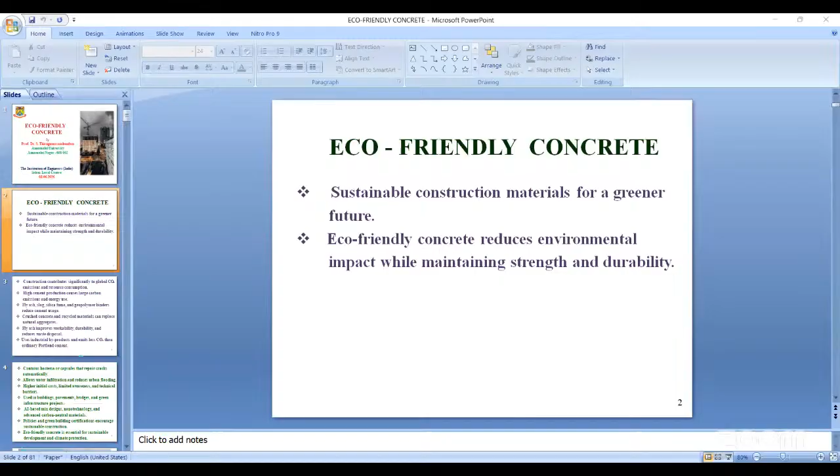The slide show is not coming. Sir, slides are also sharing, it's visible, and you are also audible. The slide is here on your screen - eco-friendly concrete, sustainable construction materials - these are all visible on the screen. So you can go on, but the slideshow is not automatic. Do you want to make it automatic? Okay sir, yes sir. Now it is okay, sir. Fine, sir.

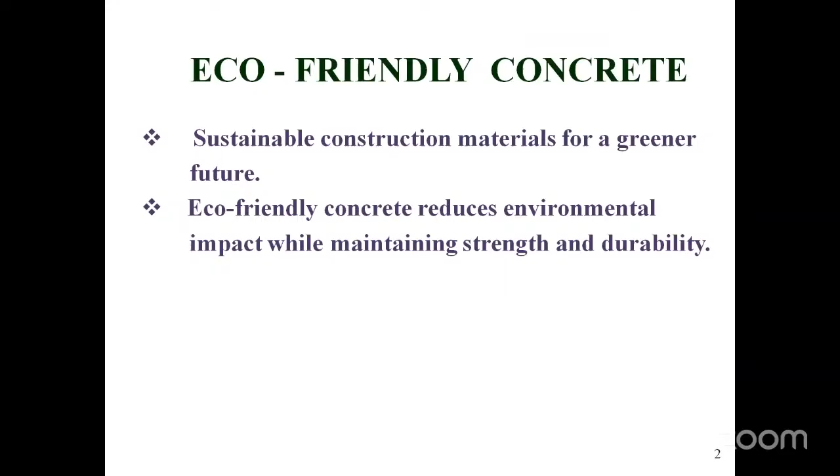In general, construction contributes significantly to global CO2 emissions and resource consumption. Let me take the first raw material used in concrete, that is cement. When you produce cement, an equivalent amount of carbon dioxide is emitted from the cement factories. So that is one of the major points we have to see. As far as possible, we have to minimize the emission of CO2 from the cement factories, or we have to eliminate cement from the concrete. So those things we are going to see in this seminar.

Second point: high cement production causes large carbon emissions and energy use. So this is a point we have to make very clear. As far as possible, we have to reduce the usage of cement by means of using supplementary cementitious material such as fly ash, slag, silica fume, and geopolymer binders.

What are these ingredients? Fly ash, slag, silica fume, and geopolymer binders - one by one we are going to see. Fly ash is the byproduct obtained from thermal power stations. Slag is obtained from the steel industries. Silica fume is also obtained from the steel industries. Geopolymer binder is one of the new materials people are now using to create binding properties in constituents of concrete without cement. We will see it in brief.

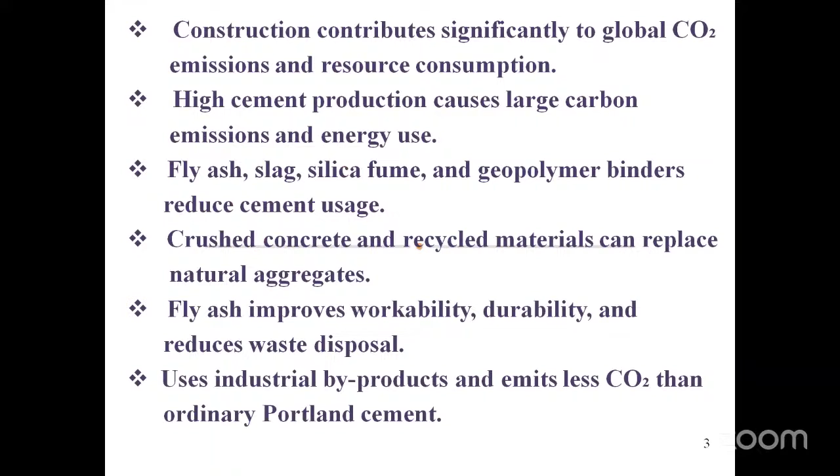When we use fly ash in concrete, it improves workability, durability, and reduces waste disposal. Nowadays, people are using fly ash as a partial replacement in cement. In cement production itself, people are using this fly ash, producing PPC from OPC. When you use these kinds of industrial byproducts, it emits less carbon dioxide than ordinary Portland cement.

Next, how to make greener concrete. Nowadays people are using bacteria in concrete in capsule form. If you use this bacteria in concrete at the time of production, it will repair cracks automatically in due course. That is one of the reasons people are making bacterial concrete nowadays.

Then another type is pervious concrete. In urban areas, especially in road construction, this concrete allows water infiltration, thereby reducing urban flooding. That is pervious concrete.

When we use these kinds of greener concretes, what will happen? What are the advantages and what are the limitations? We have to see in brief. Initially, if you introduce these kinds of greener concepts in concrete, it will increase the initial cost, and there is limited awareness. So we have to create awareness among educationalists as well as industrialists to put it into practice. And sometimes there are technical barriers too, which we have to eliminate or reduce.

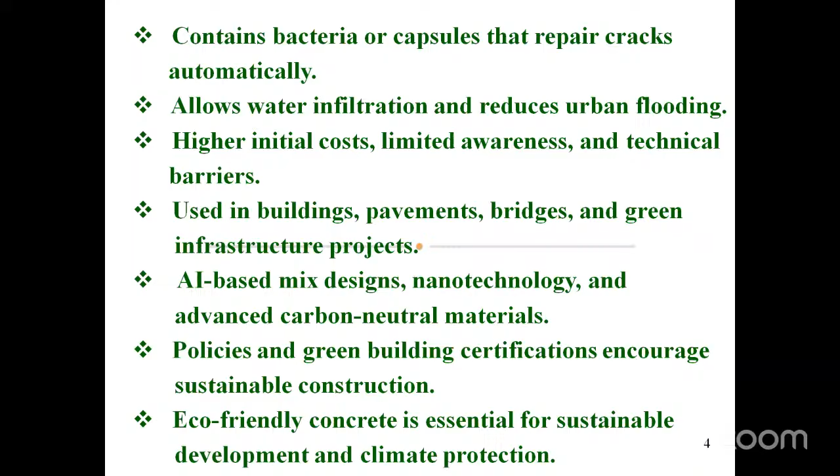Next, as far as government policies are concerned, some legal forces are required to bring green concepts into buildings, and certification is also required for sustainable construction. This is the government side; we need not worry about that. When you use this kind of eco-friendly concrete, we have to make sustainable development and climate protection possible. So this is the introduction about eco-friendly concrete.

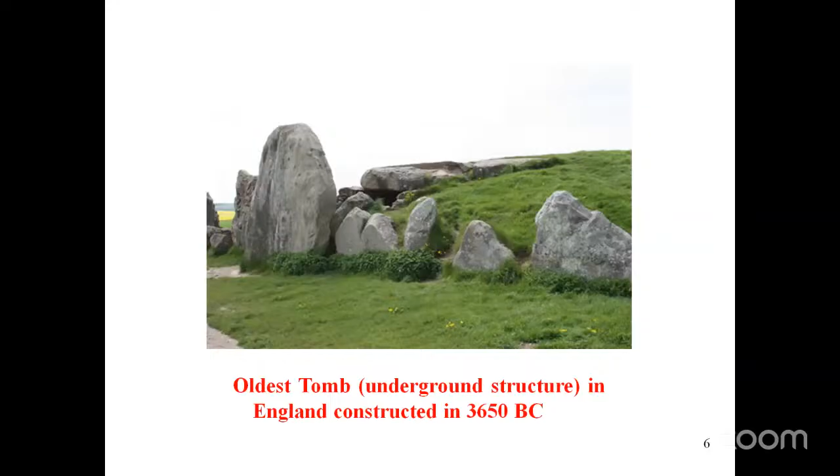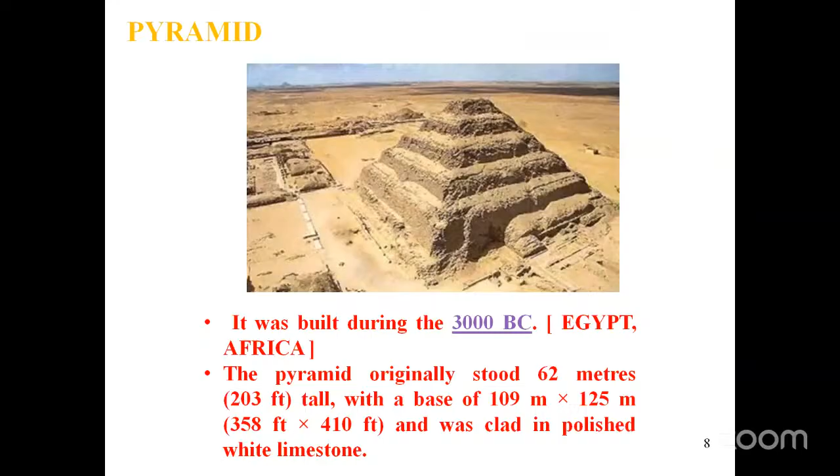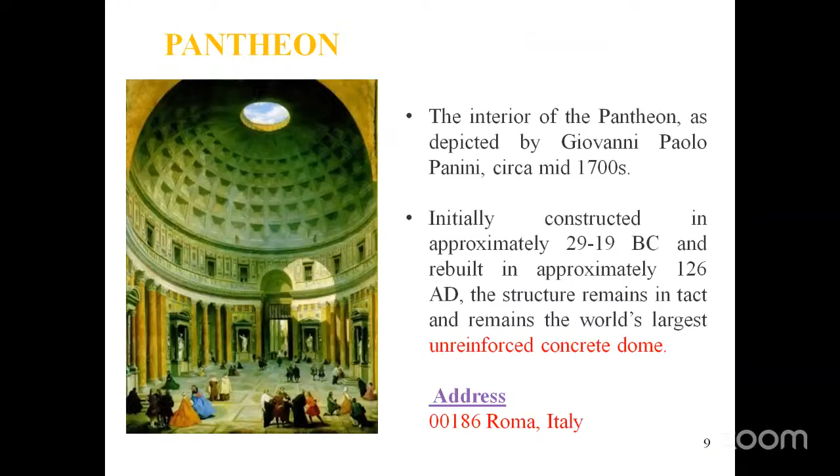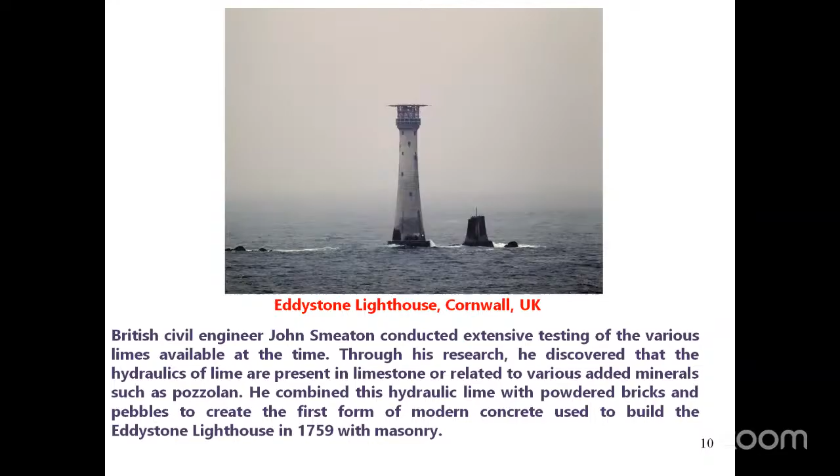Now we can see the historical evolution of concrete. In 1824, cement was actually invented by Joseph Aspdin and patented in England. Before that, before the Christian era around 500, you can see the Rome civilization and initial ancient pyramids. So we need not worry about these old structures.

Coming to the invention of cement era in 1824, and the introduction of steel in concrete in the year 1903, slowly development happened in the form of precast construction in the year 1950.

In this 21st century, people are now focusing on producing eco-friendly concrete because, as I said earlier, the ingredients in concrete - cement, fine aggregate sand, coarse aggregate jelly, and water - these four components are creating problems in terms of procuring and securing these materials safely and cost-effectively. So these are all the things in the historical evolution of concrete.

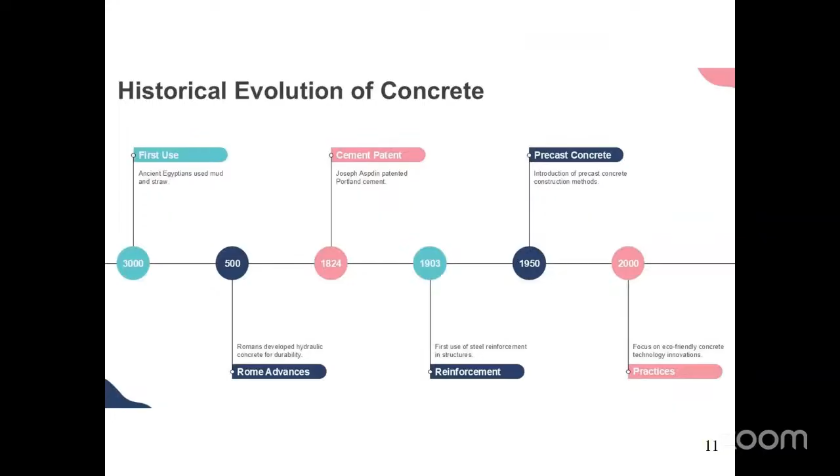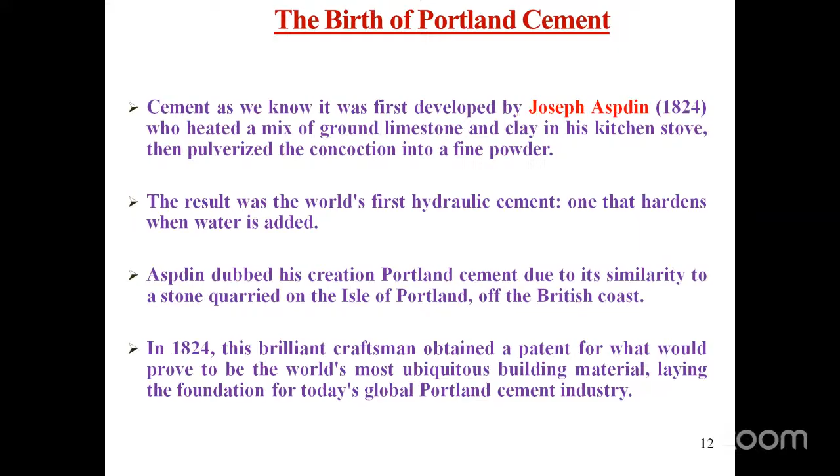Now we can see the development of concrete right from the birth of cement. Actually, this cement was developed by Joseph Aspdin, a mason's son, in the year 1824 in UK. Almost 200 years have been completed.

The cement usage in this construction industry. We know very well in the initial stage we produced only ordinary Portland cement OPC, and nowadays with the introduction of mineral admixtures like fly ash, we are producing Portland Pozzolana cement PPC. In the case of OPC, we have different grades: 33, 43, 53. But in case of PPC, no grade was awarded in India.

With respect to weight of concrete, we can have four categories: ultra lightweight concrete less than 1200 kg per m cube, light weight concrete less than 1800 kg per m cube, normal weight concrete, that is our conventional cement concrete weighing 2400 kg per m cube, and heavy weight concrete more than 3200 kg per m cube. So this is based on weight: ultra light, light, normal weight, heavy weight.

Based on the strength, we can classify concrete as low strength, less than 20 megapascal compressive strength, moderate strength concrete 20 to 50, high strength 50 to 200, and ultra high strength more than 200 megapascal.

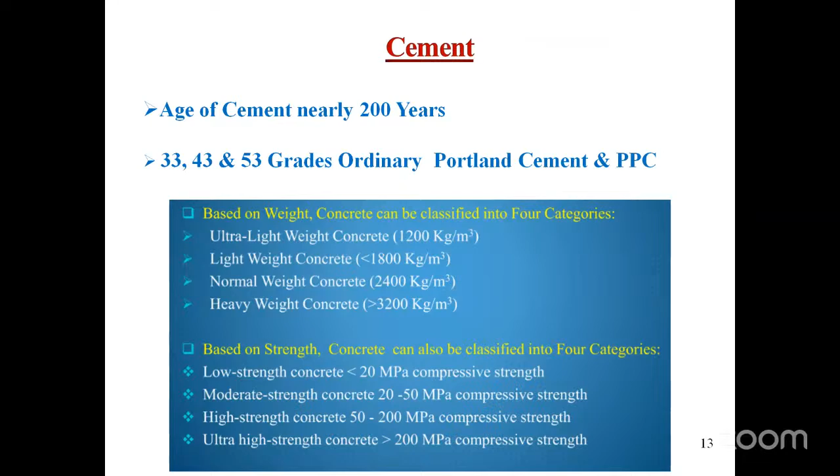Now we can see the current scenario in production of concrete. Nowadays everywhere demand increases vastly for raw materials. As we discussed earlier, procurement of cement, fine aggregate sand, and coarse aggregate is difficult due to continuous fluctuations in availability of raw materials. There are frequent hikes in cost prices of raw materials due to inconsistent availability. These raw materials are contributing to global warming by using cement. So now we are in need of finding alternate raw materials for making concrete eco-friendly.

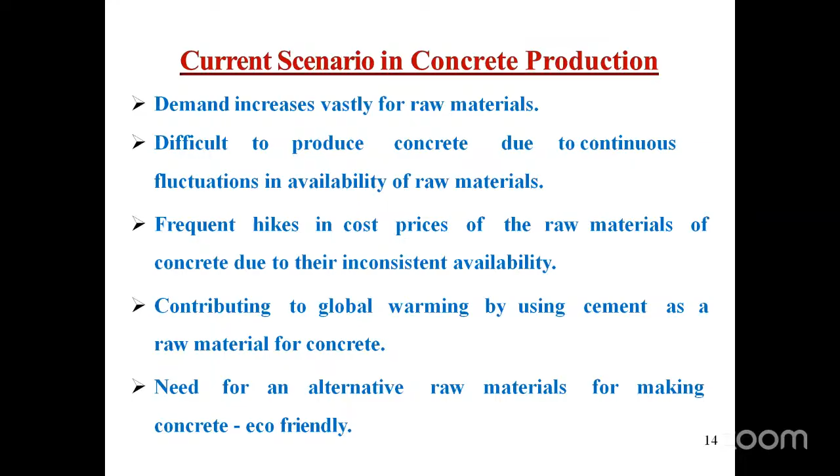Coming to concrete in general, why is concrete so popular? Concrete can be fabricated practically anywhere. It can be molded and cast into a wide range of shapes and geometry. It is relatively cheap, stronger, and more durable. It is a versatile material. What do you mean by versatile material?

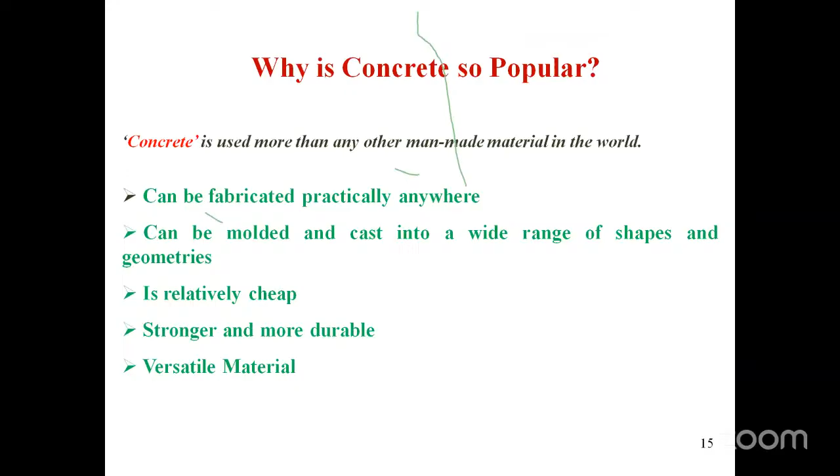We never worry about mix design, but for M15 and M20 we manage to get by. If you go for a higher grade, more than M25, it is very difficult to get the nominal mix proportions. At that time we need IS 10262 to support. Now coming to admixtures in concrete.

Chemical admixture, mineral admixture - we do not worry about mineral admixture. Nowadays we are getting PPC cement, which includes supplementary cementitious material. So automatically we are getting PPC in addition with the mineral admixtures.

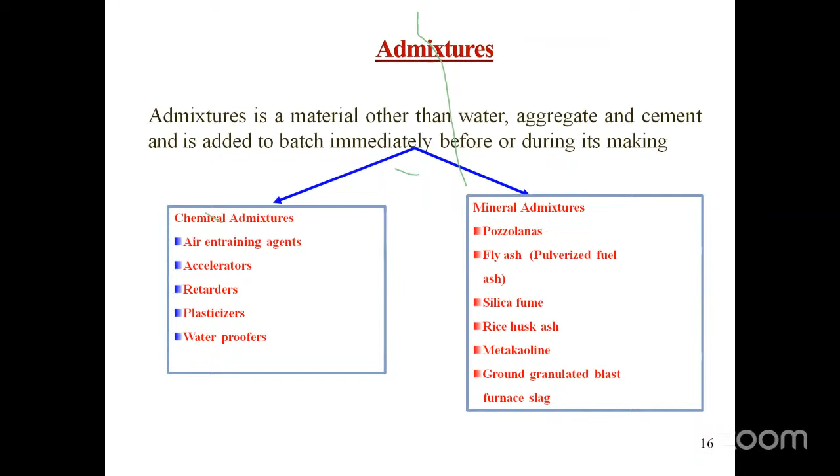Coming to chemical admixtures, with respect to special concrete we need some special chemical admixtures. In general we are using SP superplasticizer, that is the general chemical admixture normally people are using. We need not worry about other chemical admixtures used for special applications.

Coming to quality of concrete - it is very important with respect to durability of concrete. So several points we have to see, right from water cement ratio. As I said earlier, concrete is the most democratic material in the world, so nobody is worrying about water cement ratio. When you increase water cement ratio, what will happen?

Normal water cement ratio we are obtaining from the mix design as per IS 10262. If you add more water, what will happen? Strength decreases. If you reduce water, what will happen? Shrinkage - slump will be affected, workability will be affected. So with respect to IS 10262 mix proportions and water cement ratio, we have to be doubly careful in selecting the water cement ratio.

We will see some slides on the technical aspect with respect to water cement ratio, then sand stone ratio - that is the ratio between fine aggregate and coarse aggregate - and cover depth. In general people are using cover blocks in slab as well as beams, but with respect to exposure conditions, the thickness of cover varies, so we have to be doubly careful in getting the cover.

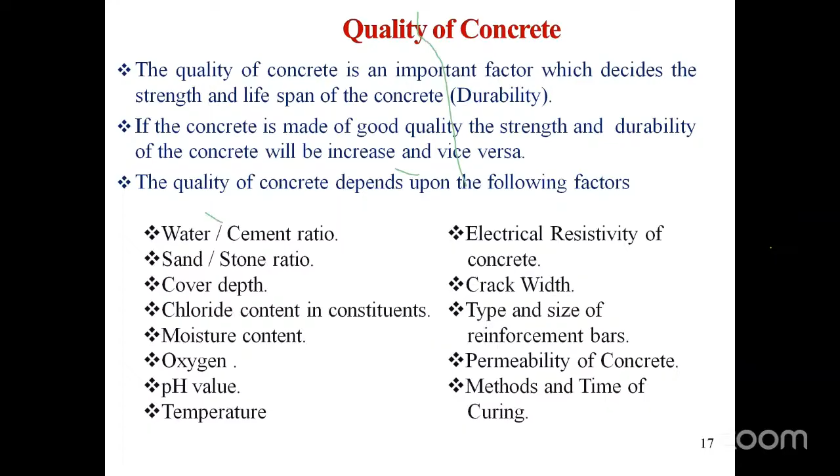Okay, then electrical resistivity, crack width, type and size of reinforcement bar, permeability of concrete, method and time of curing - one by one we have to see it elaborately. Due to running short of time, I am just passing these slides.

Now we can see the basic material properties. Normally people are concentrating on density of concrete. Suppose if there is 5% voids in concrete, what will happen to strength?

You see the note given below this graph - 5% voids can lower the strength by as much as 32%.

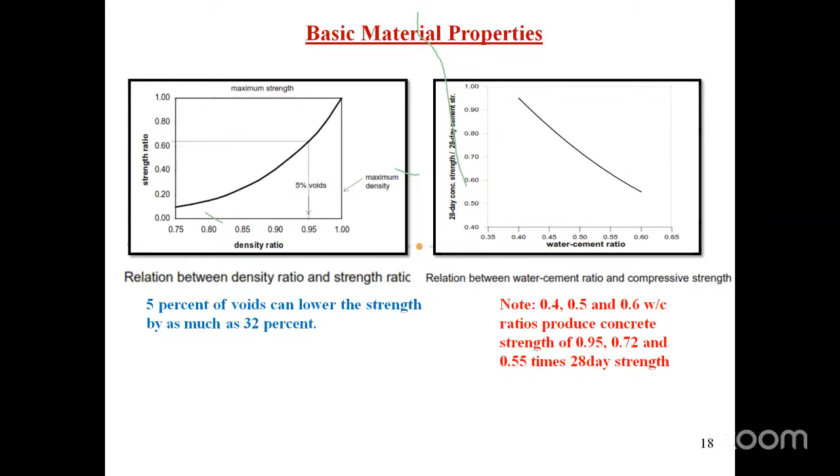Another important technical point - if you see the stress strain curve of concrete with different grades, which test is required to get this stress strain curve of concrete?

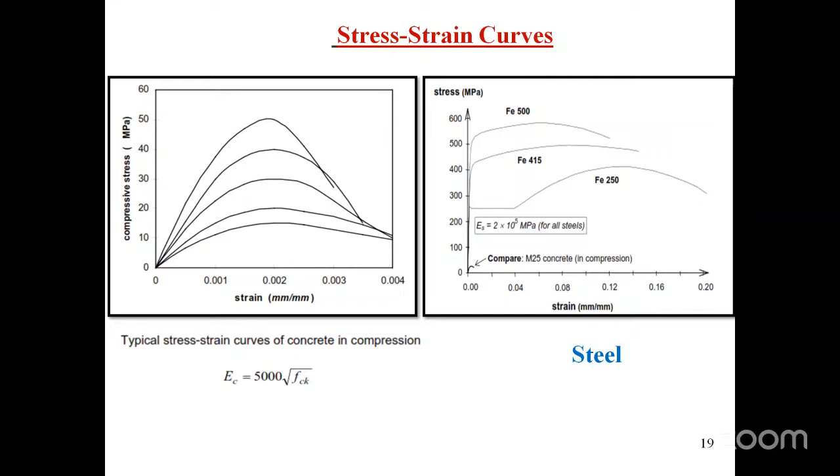But at the same time, what is the modulus of elasticity of concrete in different grades of concrete? Is it constant? No, it is varying with respect to compressive strength FCK. We can get the modulus of elasticity of concrete, that is 5000 into root of FCK approximately. EC is varying, but ES is constant for all grades of steel.

Next, coming to the design strength of concrete, the value of concrete compressive strength obtained from a concrete specimen in the Indian scenario, British standard, is a cubical specimen of 150 mm. From that we are getting the FCK value, and 0.67 FCK - that is a reduction of strength of 33%. Again, to get the design value of concrete, we are applying a partial safety factor of concrete, that is gamma m.

What is gamma m for concrete? What is gamma m? Concrete's partial safety factor - how much? Sir, 1.5. 1.5, sir. Very good, right.

What is the step down from FCK to 0.67 FCK? 33% reduction is given initially. What is the reason behind it? Sir, if it is for safety factor, sir.

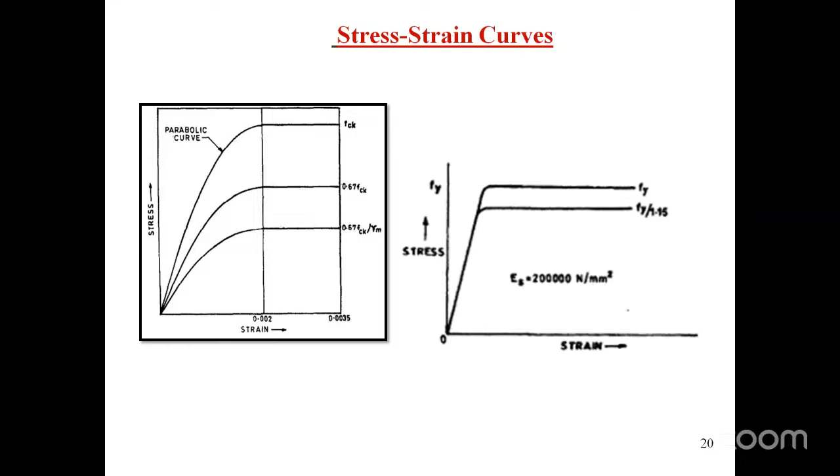Coming to the steel side. Steel is a factory made product. If steel is 10 mm, you will use 10 mm only; if 12 mm, 12 mm only, in the factory it's 12 mm and on site also 12 mm. So there is no reduction to take care of size of the specimen. Are you able to understand this point?

Clear? Yes sir, right. So coming to different types of concrete, quickly I want to wind up this session. We'll just see pictures. There are n number of types available in concrete.

Normal strength, that is M20 grade concrete, general. Then plain or ordinary concrete - plain concrete from M5, M10, people are using for getting platforms and all. Then RCC, pre-stressed concrete, precast concrete, lightweight concrete, high density concrete, air entrained concrete, ready mixed concrete, polymer concrete. N number of concretes available.

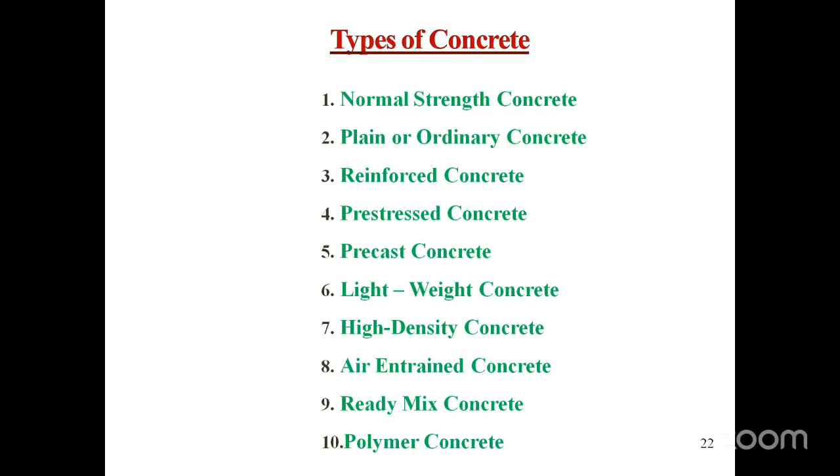Just a simple list is shown here, let us see one by one. Just pictures only I want to show you, there are no specific test results and all, right? This is fiber reinforced concrete.

We know different kinds of fibers, right? Glass fiber, carbon fiber, basalt fiber, then plastic polypropylene fibers. So what is the need of these fibers in concrete?

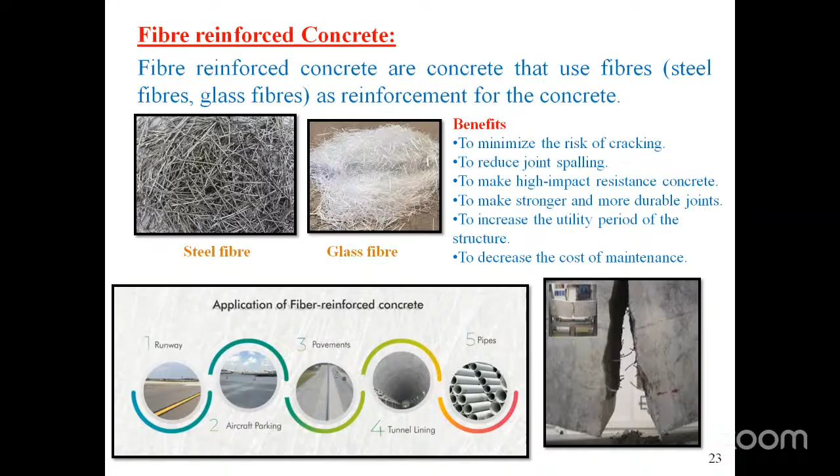Tensile strength. Very good, okay. Technically, flexural strength is getting increased when you introduce these kind of fibers in concrete. Steel fiber, glass fiber, there are several fibers available. We have to be careful in mixing and proportioning.

Right, this is textile reinforced concrete. Nowadays people are trying these kind of textile fabrics. I don't know the results, but people are working on it.

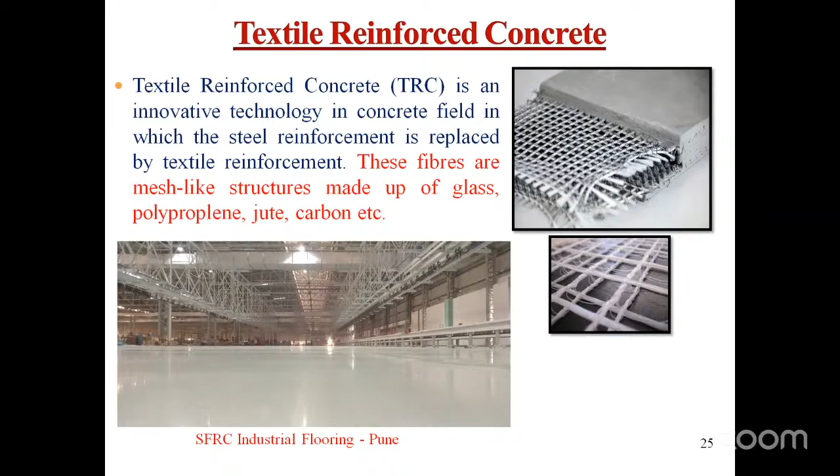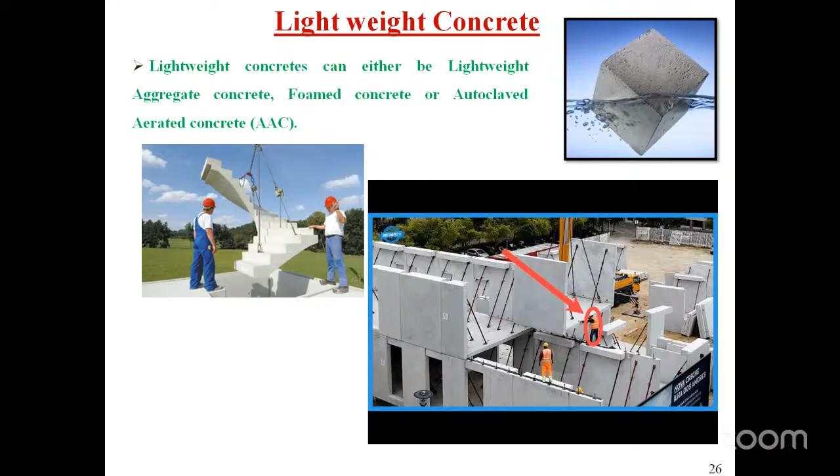Right, so this is lightweight concrete. Concrete is floating in water. The main drawback of concrete is self-weight of concrete. So now people are producing ultra light concrete by means of autoclaved aerated concrete, AAC. Ultra light concrete is being produced nowadays.

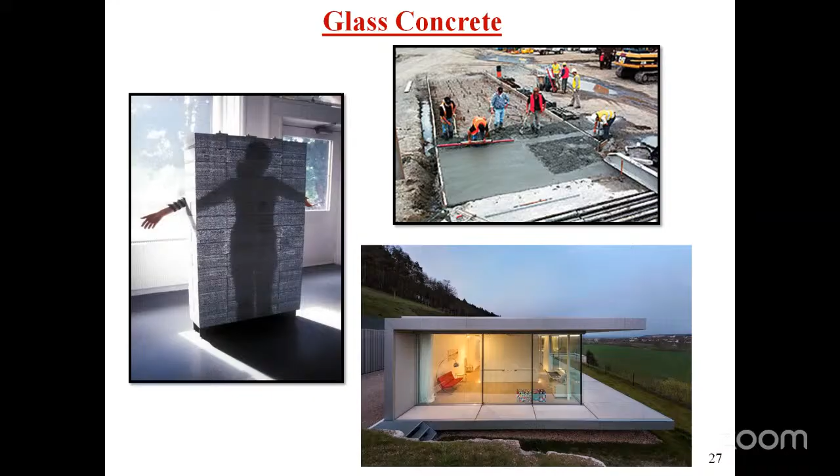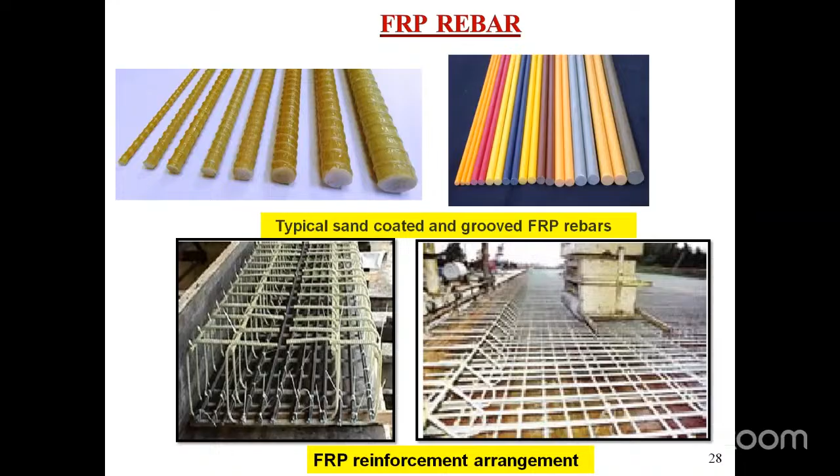Then this is glass concrete, right? For pavements and walls, people are producing this glass concrete, and the introduction of FRP rebars reduces or eliminates corrosion of reinforcement, right?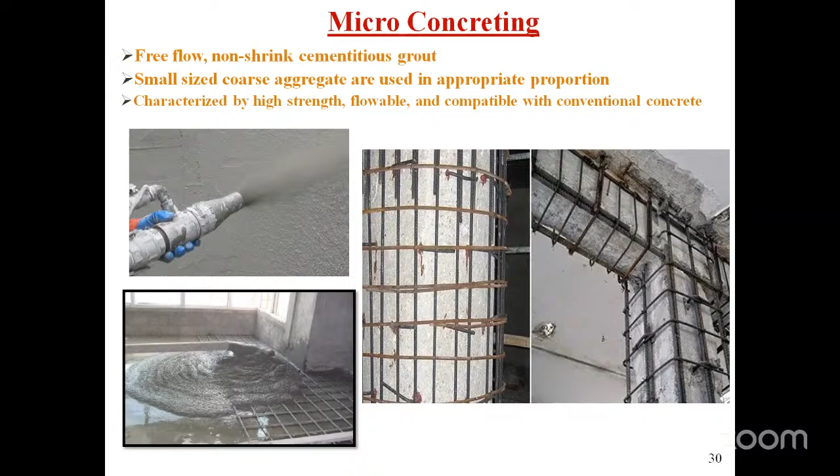Micro concreting is required for repair purposes. In these pictures, jacketing of newly introduced reinforcement is done with micro concreting.

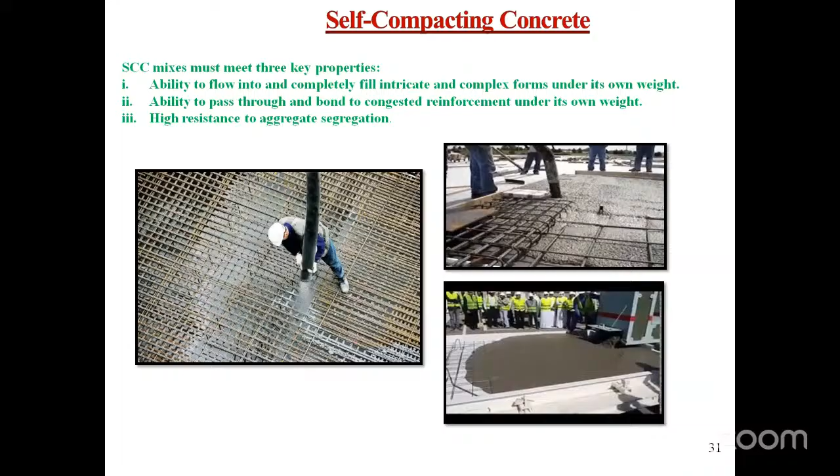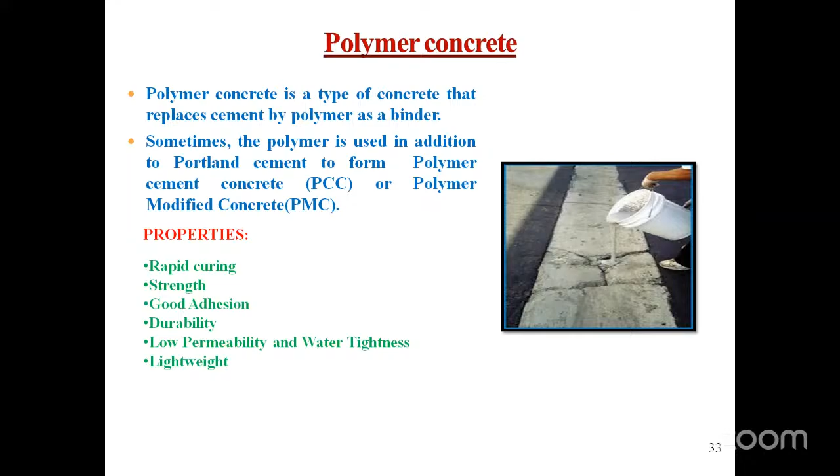Self-compacting concrete: the drawback of concrete is compaction, so to get self-compaction, people are introducing SCC nowadays. Then polymer concrete was introduced in the market. In general, PCC and PMC are used in case of repair works.

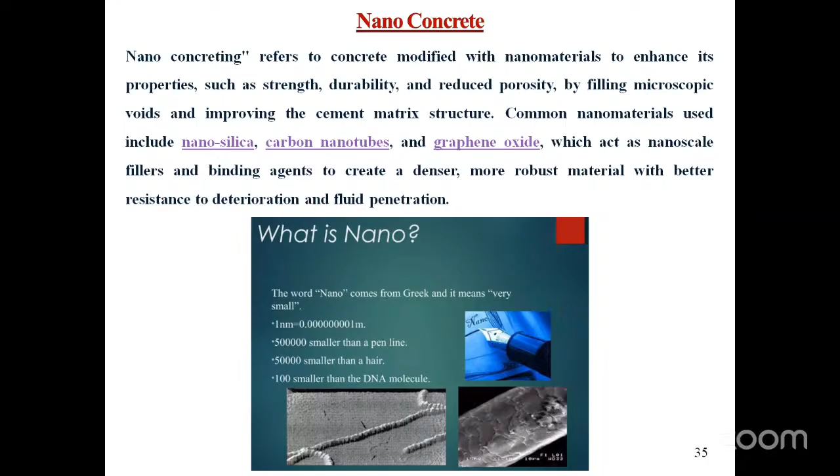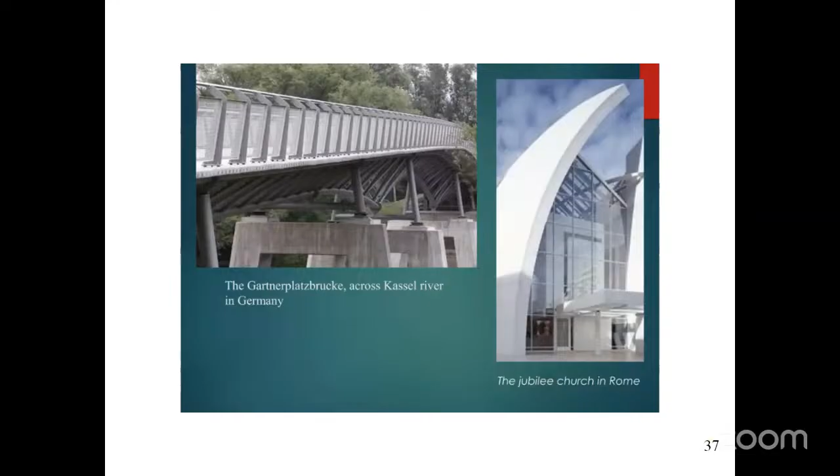Then nano concrete. Now people are producing nanoparticles, nanosilica, carbon nanotubes, and graphene oxides. These are all added to concrete to get nano concrete. The main purpose of introducing these nanoparticles is to get high strength.

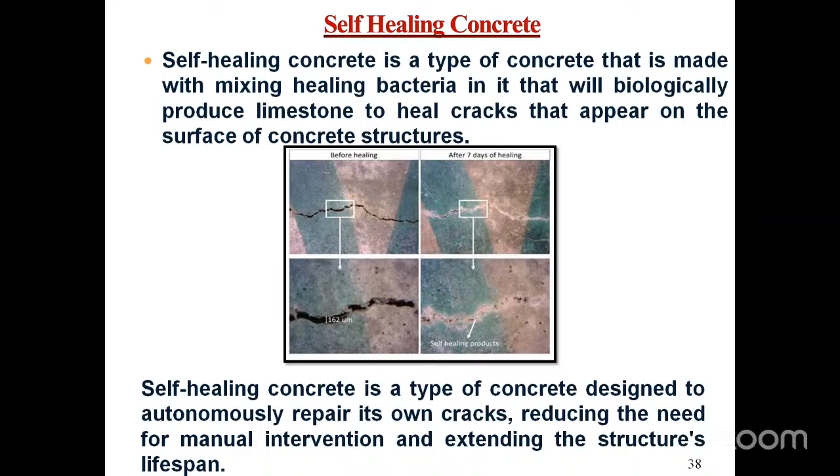Then self-healing concrete. When you use some healing bacteria at the time of mixing concrete, biologically it will produce limestone and heal the cracks when they initiate in concrete. So automatically the cracks get closed. That is called self-healing concrete.

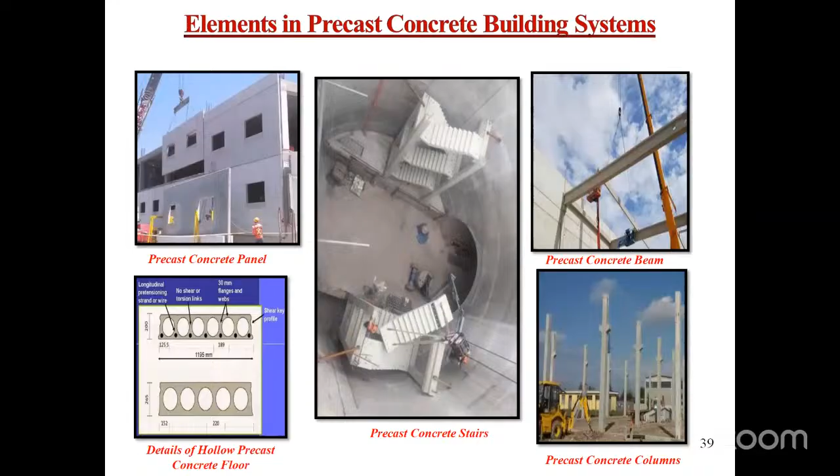Another revolution in the concrete industry is precast blocks, precast components. Still we are struggling in introducing these kinds of precast elements in normal constructions. For special constructions, Teamage and other leading group of companies are producing this kind of ready-made components, but it is not getting popularized. But in due course, we will see a lot of precast concrete building systems.

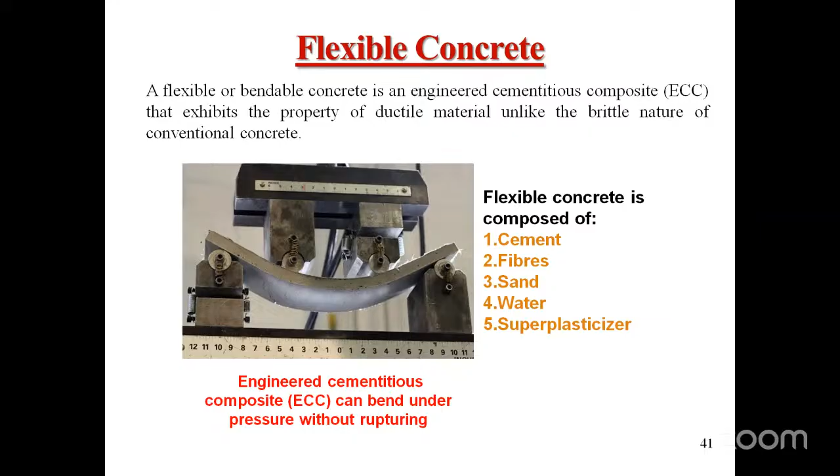Another new concrete is ECC, which is bendable concrete. Concrete can be bent like this.

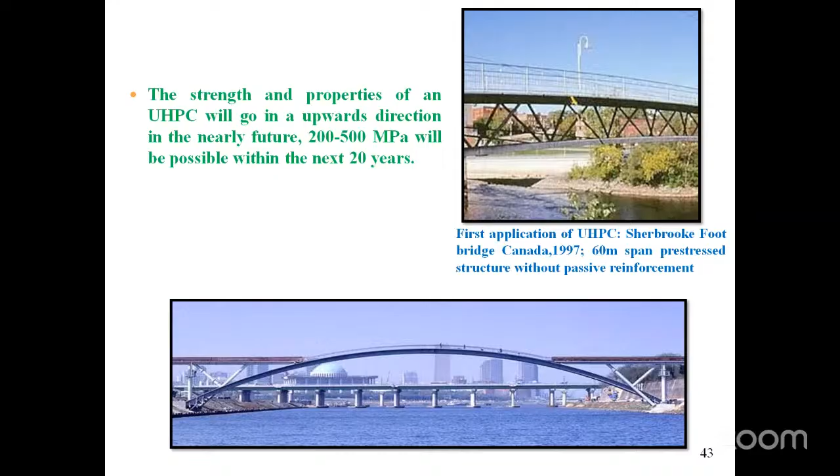Another one is reactive powder concrete. To get ultra high strength, people are producing this 500 megapascal concrete. In case of high strength bridges and other military operational works, people are introducing this.

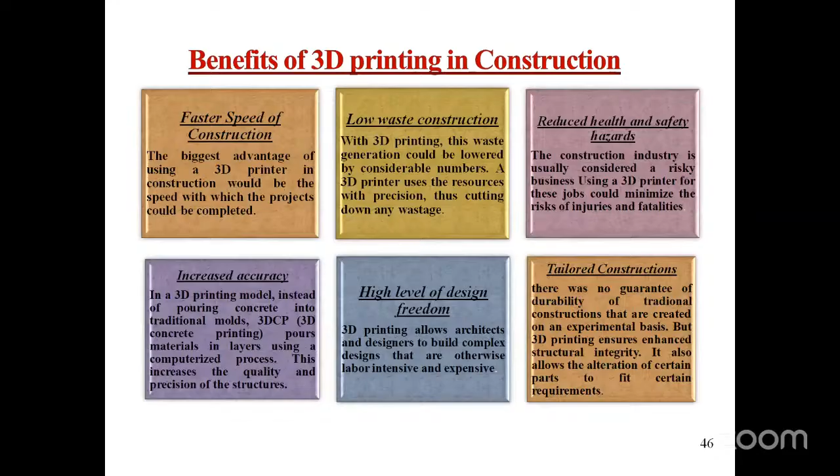Another revolution in the concrete industry is 3D printing. Only in some modules, people are trying to get this kind of 3D blocks and walls.

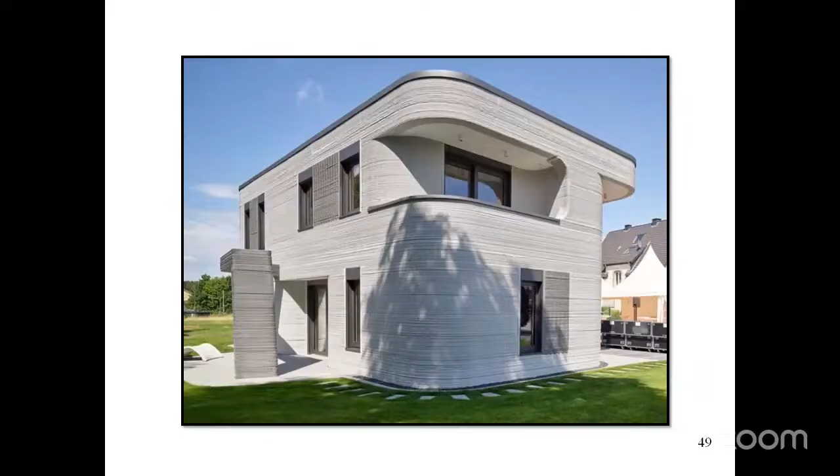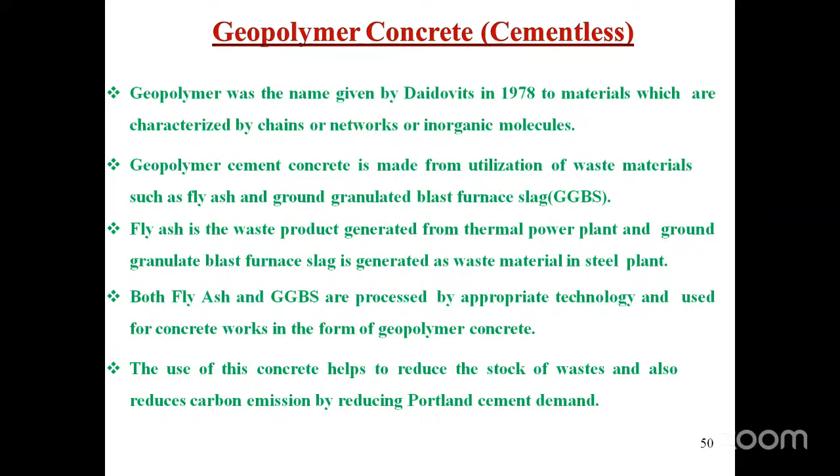Let us have a quick look at geopolymer concrete. Actually, I have been working in geopolymer concrete for the past 15 years. This geopolymer concrete is cementless concrete, introduced by Joseph Davidovits in the year 1978 in France. Here, cement is completely eliminated. Instead of cement, people are using fly ash, GGBS, and alkaline solution.

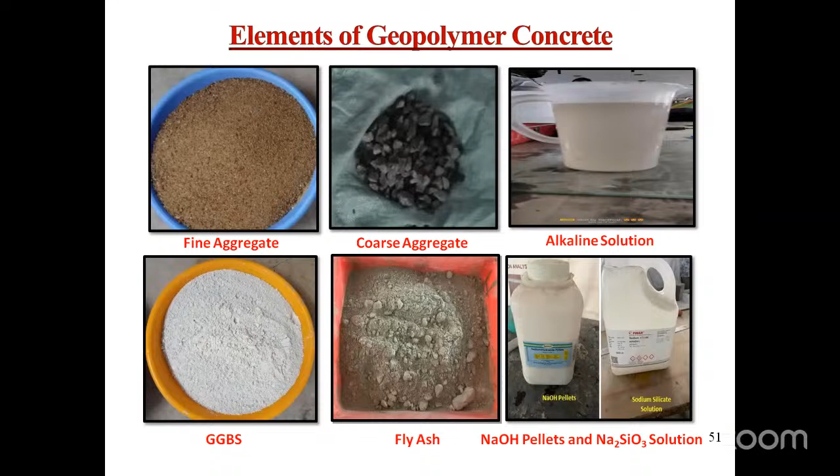That is the binding material. Apart from this, fine aggregate and coarse aggregate are same. Here, 0% cement is used. Instead of cement, people use fly ash, GGBS, and alkaline solution. What is alkaline solution? It is a mixture of sodium or potassium silicate and hydroxide. There is some ratio proportion; with respect to that, we mix this to get the alkaline solution. From this alkaline solution, you add fly ash, GGBS with the sand and coarse aggregate, and you get this geopolymer concrete.

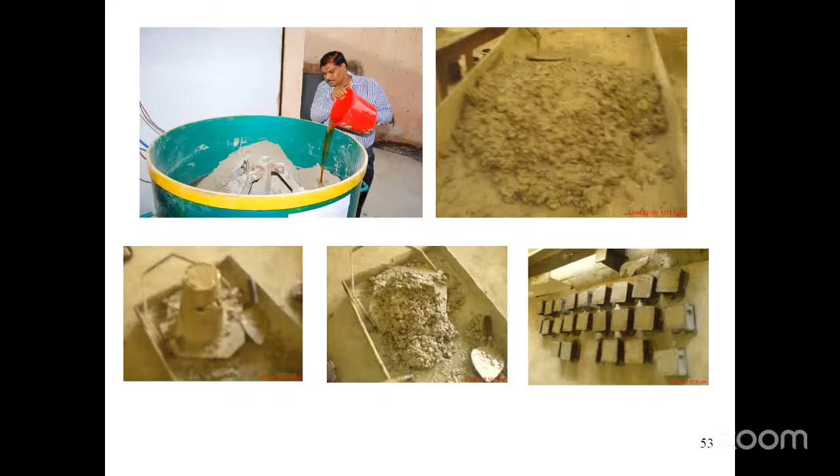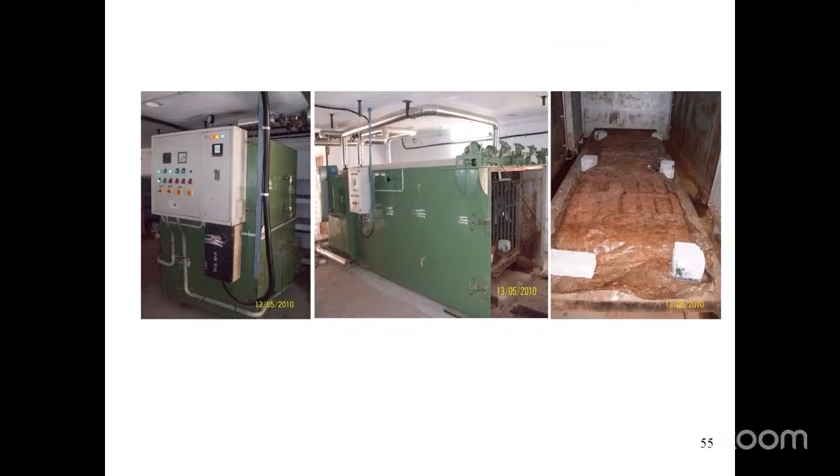The advantage of geopolymer concrete is curing. Initially, people tried this geopolymer concrete with hot curing. With 24 hours hot curing, we can get the 28 days compressive strength of concrete as obtained from conventional cement concrete. In that case, only people used fly ash. Nowadays, the scenario is changing. Introduction of GGBS in geopolymer concrete eliminates this hot curing or steam curing.

Very simple sunlight curing, that is called ambient curing, is enough to get the compressive strength of concrete. Even with 24 hours air curing, you can get the strength of concrete as obtained from conventional cement concrete. So this is the specialty of this concrete.

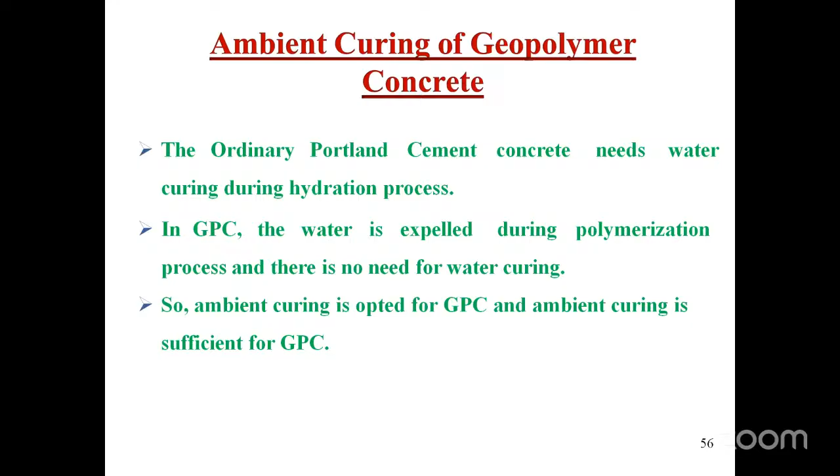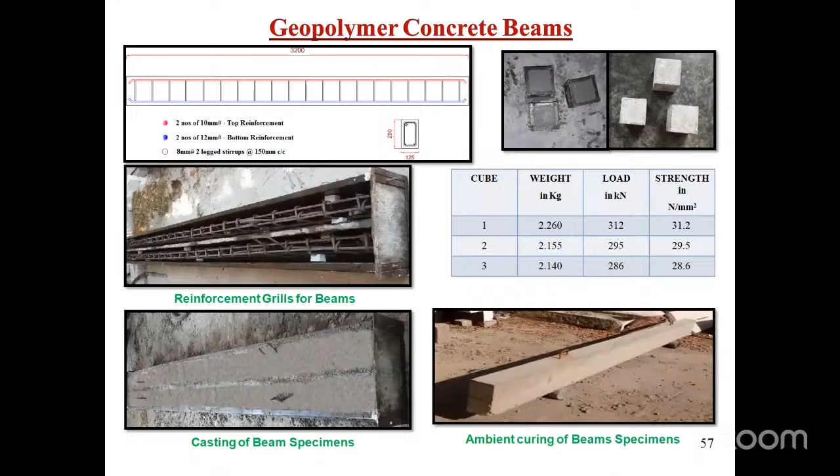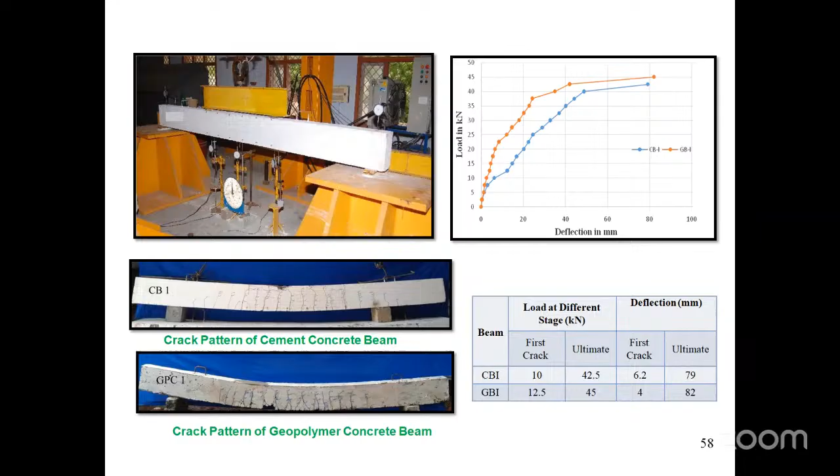In our Annamalai University, we have carried out a lot of experiments in our laboratory with respect to testing of RC beams, 3-meter beams. This is geopolymer beam and conventional cement concrete beam. We can see the comparison of load carrying capacity. I don't want to go into detail about the results and discussion, but you can see the comparison of how much load carrying capacity is in control concrete beam versus cement concrete beam and geopolymer concrete beam, and which is giving higher values.

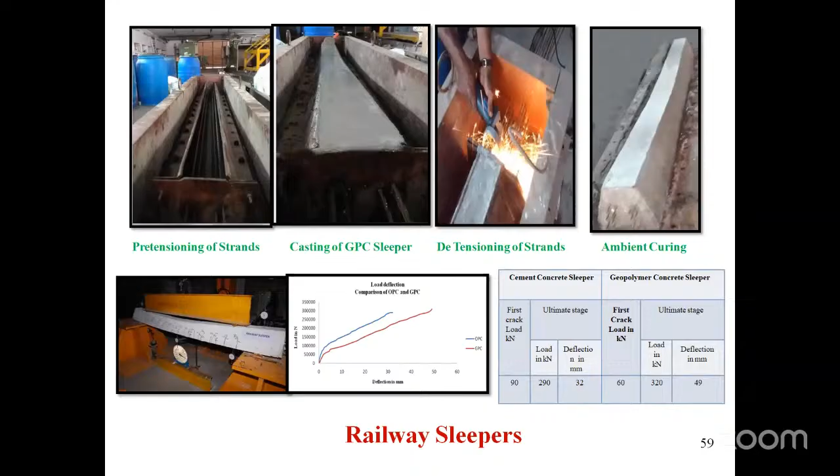Like that, this is railway sleepers. You know very well, these kinds of sleepers are made from PSC, pre-stressed concrete. Here, M60 grade concrete is used to get these railway sleepers. Comparison made between cement concrete sleeper and geopolymer concrete sleepers.

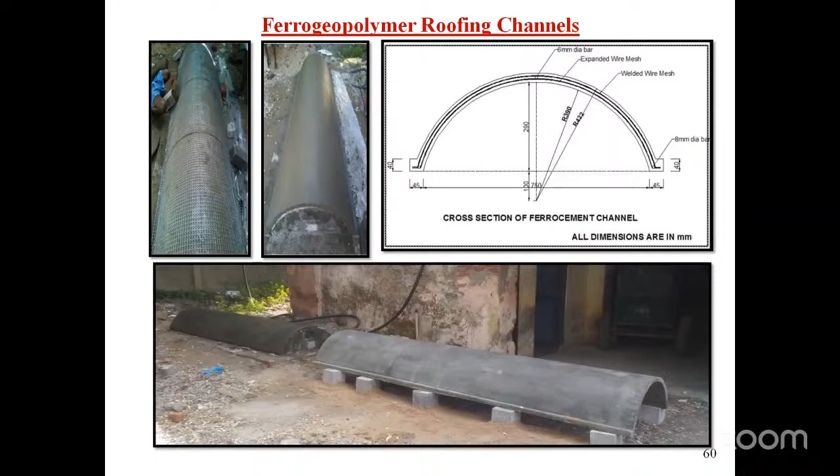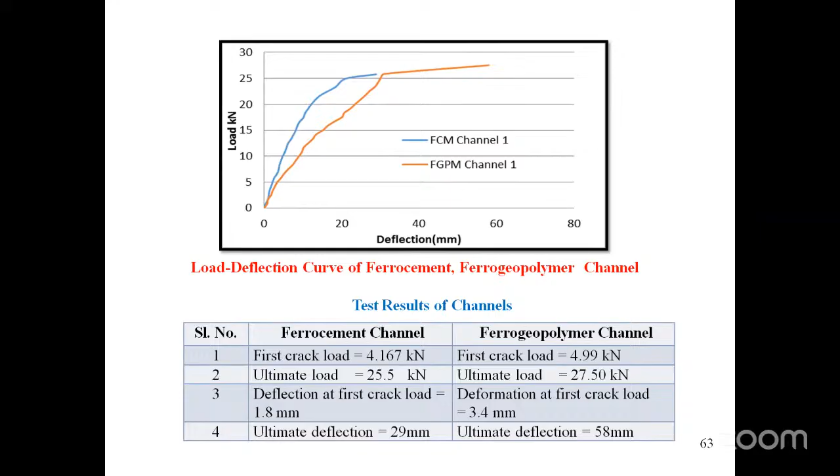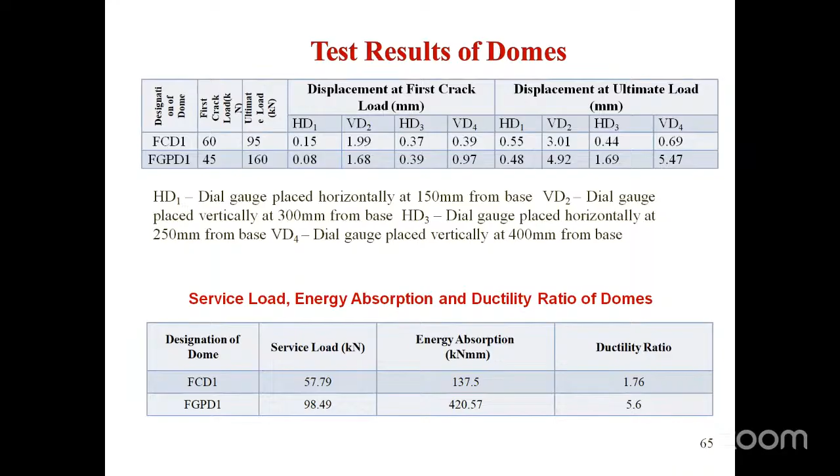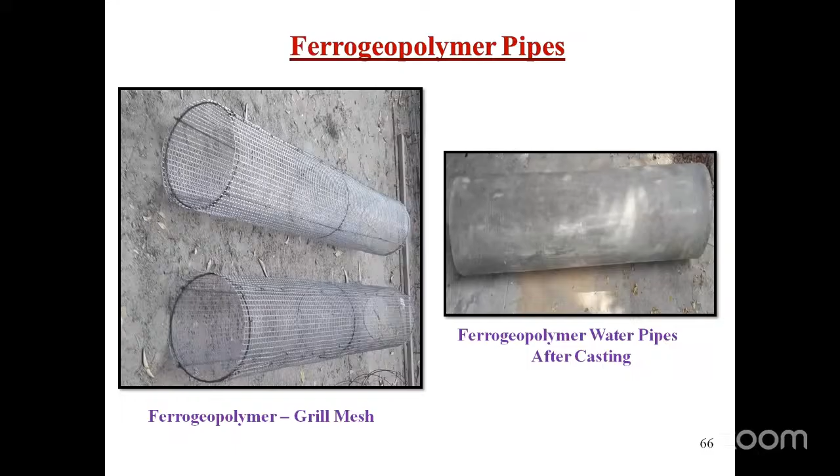Like that, several components of GPC elements were tested in our lab and compared with conventional ferrocement channel and geopolymer channels. This is domes. Here also we have a comparison between ferrocement domes and ferro-geopolymer domes. This is pipe - conventional ferrocement pipe and ferro-geopolymer pipes. The pipes were tested in our lab and the comparison is also given.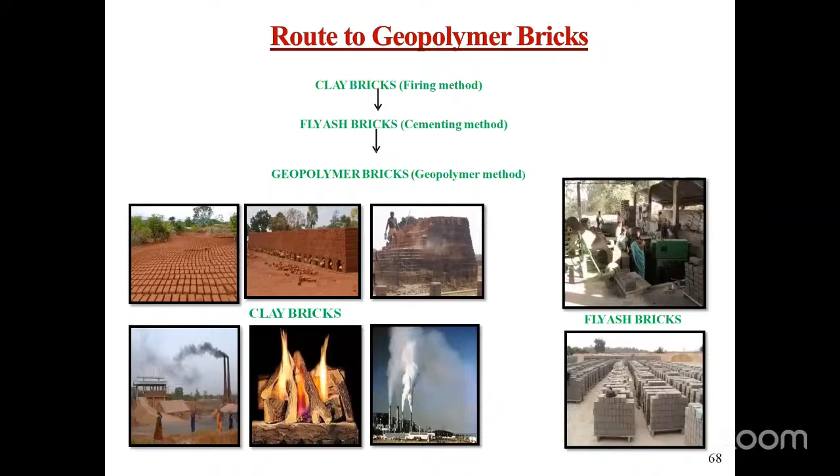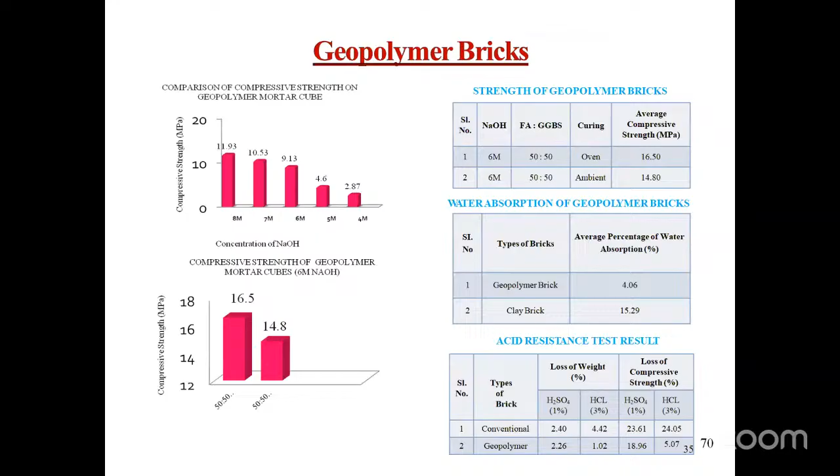Similarly, we made geopolymer bricks. In geopolymer bricks, clay is completely eliminated. In fly ash bricks, people use cement; here, cement is also completely eliminated. Only fly ash, GGBS, and fine aggregate, that is sand, mixed with alkaline solution, give you these geopolymer bricks. The comparison was also made, and we proved geopolymer technology is very well adopted in case of concrete as well as bricks.

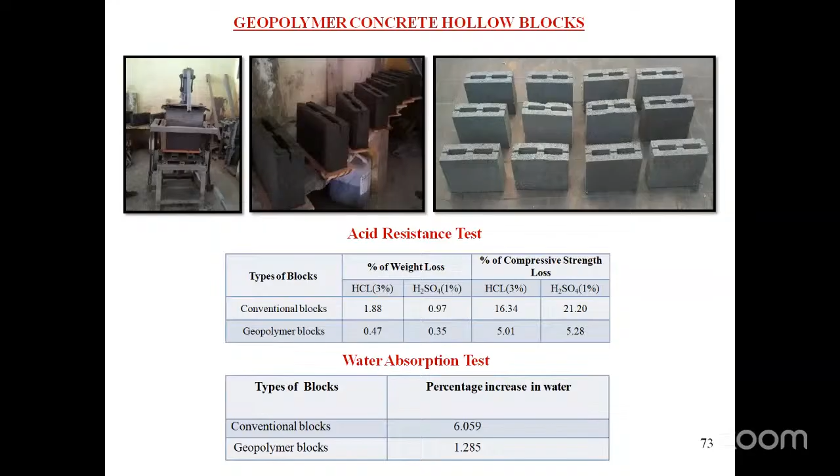Sir, what is a mortar? Binding mortar - which one? What is a mortar, cement mortar? Binding, as I said earlier, this is only fly ash, GGBS, and alkaline solution. That's all.

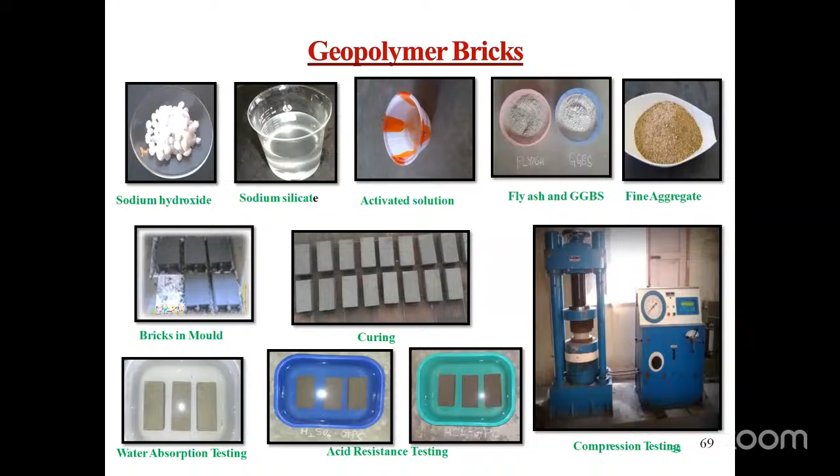There is no cement at all. Curing is only 7 days, sunlight curing is enough. No need for water curing.

Slowly we introduced this into road construction. Annamalai University professors, myself and Dr. Antony Jeyasehar, my guide, were appointed as consultants by Government of India in National Thermal Power Corporation, NTPC, to form these geopolymer concrete roads in India. So we made one pilot project in Telangana, in Ramagundam. You can see this road formation using geopolymer technology, 0% cement.

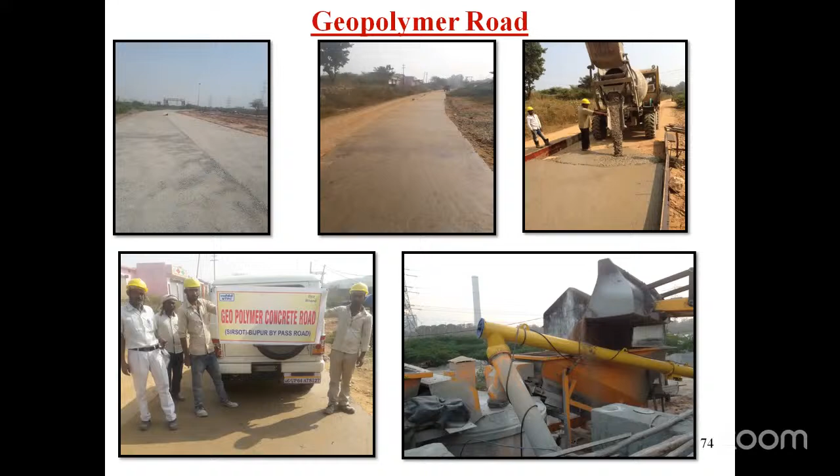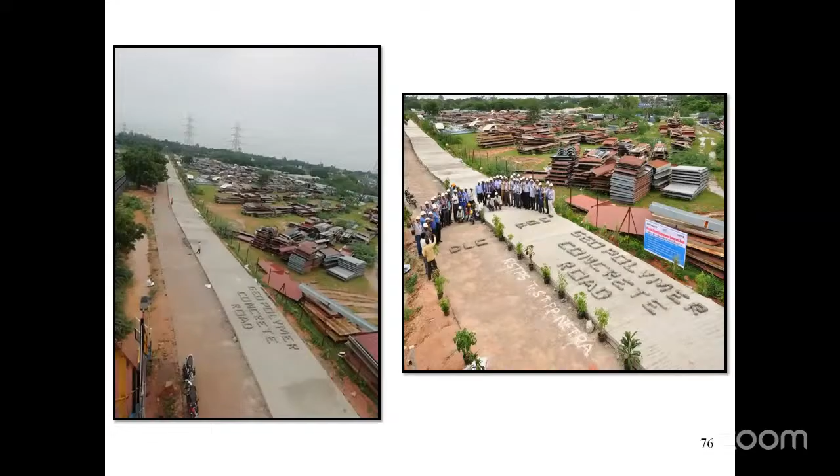Here we introduced this GPC in RMC. In RMC we made this geopolymer concrete. Actually, 1.2 kilometers of road we made here in Ramagundam.

We know very well concrete roads contain 2 layers. One is the bottom layer, that is lean concrete, and the top layer is pavement quality concrete. Bottom is called DLC, dry lean concrete, that is M10 grade, and the top layer is PQC, pavement quality concrete. In this picture you can see these 2 layers. Left side is DLC, right side is PQC. 2 layers, bottom layer and top layer. Bottom layer M10 grade, top layer M40 grade.

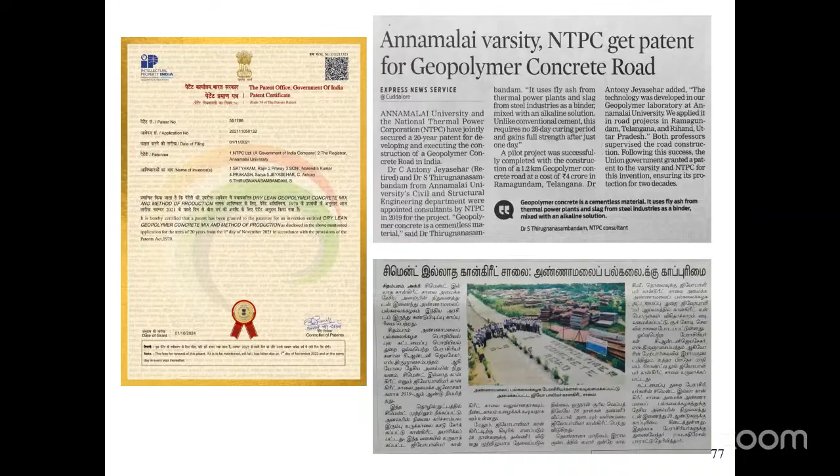So both we made by geopolymer technology, 0% cement, and we obtained a patent for this bottom layer in the year 2024. It is a joint patent obtained by Annamalai University and NTPC, granted by Government of India for 20 years. It was flashed in papers also. Recently, 2 months back, we obtained the patent for the top layer of concrete, PQC. So for both layers, Annamalai University and NTPC obtained a 20-year patent for the formation of cementless geopolymer concrete roads.

Geopolymer technology is very well adopted in India nowadays. So in that point of view, we must thank Joseph Davidovits for his kind visit to our Annamalai University.

This is the last slide I want to show you. By concluding remarks: yesterday we made a foundation for new inventions, today we are advancing in technology, tomorrow we are going to reshape the construction industry with greener technology. So with this, I wish to conclude my lecture. If you have any clarifications or doubts, we can discuss them now.

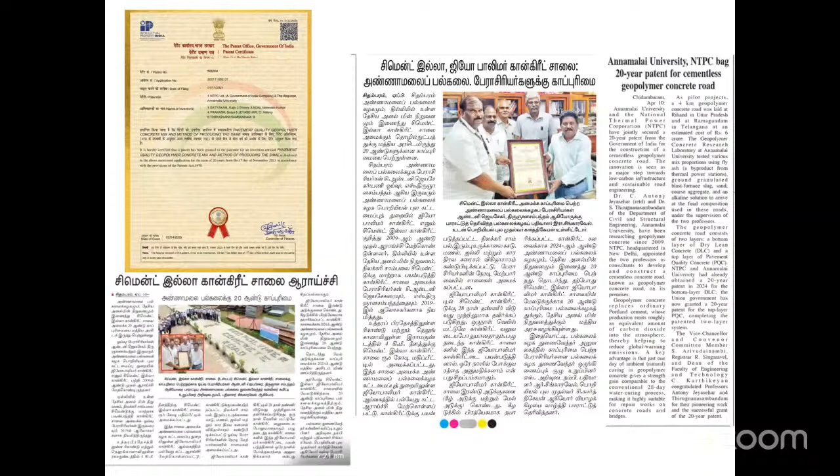I think somebody with the name Ragini has raised an inquiry. May we know what is your question, ma'am? You raised your hand. Is there any doubt from anybody else?

Okay, thank you very much sir. You have given a broad overview of concrete, eco-friendly concrete with the cementless construction methodology. Thank you for your presentation. I would like to request Dr. R. Satish Kumar, Honorary Secretary, Institution of Engineers India, Salem Local Center, to propose the vote of thanks. Please sir. Before that, I wish to thank the organizers for giving me this nice opportunity to share some concrete views with the audience gathered by the Institution of Engineers.